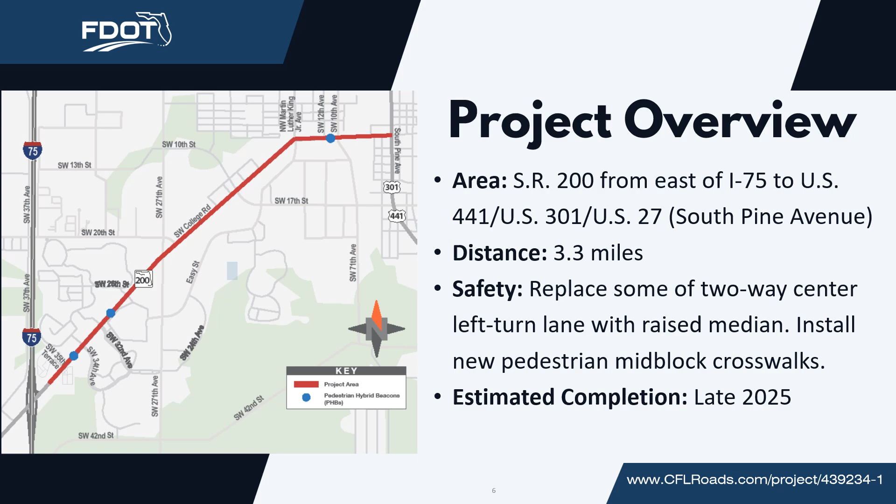FDOT is working toward a goal of 0 fatalities and serious injuries on state roadways. With every project, the department looks at existing traffic data and evaluates whether engineering steps can be taken to help enhance safety. The proposed changes in this project will improve safety throughout the corridor by providing fewer and safer left turn opportunities, including signalized intersections, and will encourage safer driving speeds, enhance pedestrian connectivity, and provide overall safety for all users.

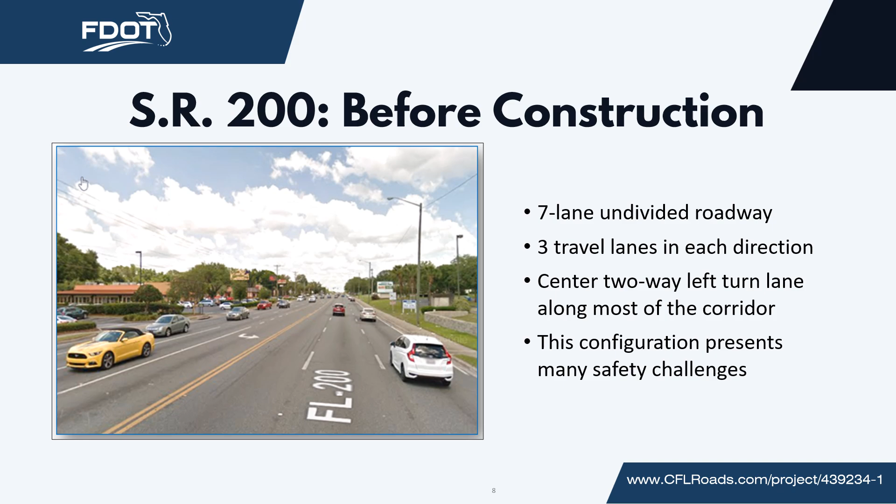State Road 200 is a 7-lane undivided roadway with 3 travel lanes in each direction and an unrestricted center 2-way left turn lane in the middle. The lack of median restrictions on this roadway means there are more conflict points. Conflict points are places along a roadway where the paths of 2 vehicles can legally cross, just not at the same time. In other words, a conflict point is a location where a crash can occur.

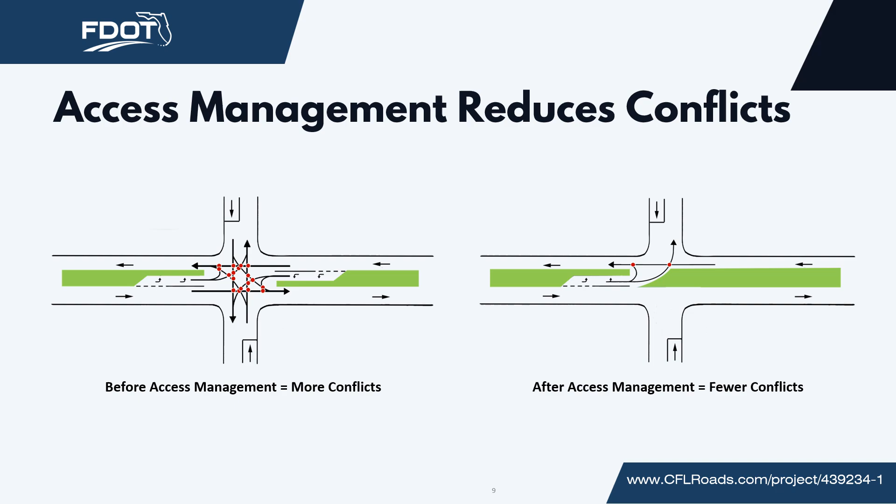FDOT data shows there were nearly 1,000 crashes with serious injuries along the corridor in a 10-year period. And of those crashes, 8 people died, including 2 pedestrians. From 2014 to 2023, there were 3,793 crashes along State Road 200 from just west of I-75 to US 441 or US 301. There were 379.3 crashes on average each year from 2014 to 2023.

Of those crashes, 39 involved bicycles with no fatalities, and 25 involved pedestrians with 2 fatalities. A lack of median restrictions contributed to the high number of crashes. Also, two-way left turn lanes are intended for roadways with fewer lanes and lower speed limits. The recommended improvements are designed to help reduce conflict points and therefore reduce crashes and crash-related injuries.

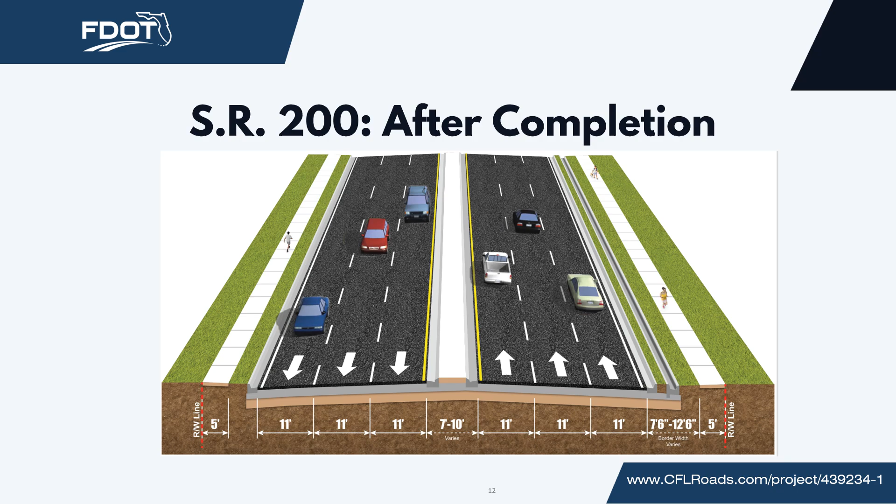As seen in this artist's rendering of the corridor, replacing the center turn lane with a raised median will reduce many left turn conflict points. However, constructing the median will require several lanes to be closed at certain times. FDOT has been working diligently to formulate a plan to reduce these construction impacts. The median installation will require 2 lanes to be closed at a time. However, FDOT finalized a plan to mitigate lane closures as much as possible.

The new median will be constructed from east of I-75 to east of Southwest 17th Street, and the existing median will be upgraded from MLK Jr. Avenue to US 441 or US 301. FDOT plans to minimize lane closures by closing short segments of the inside lanes in each direction during installation.

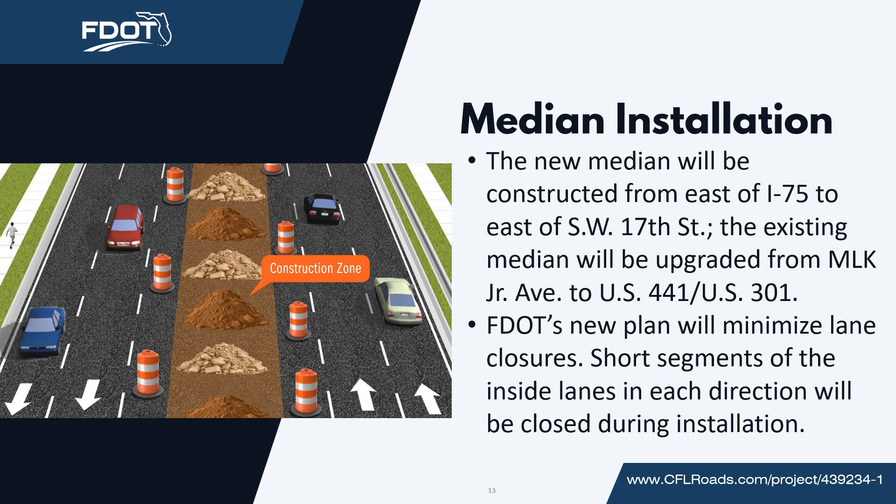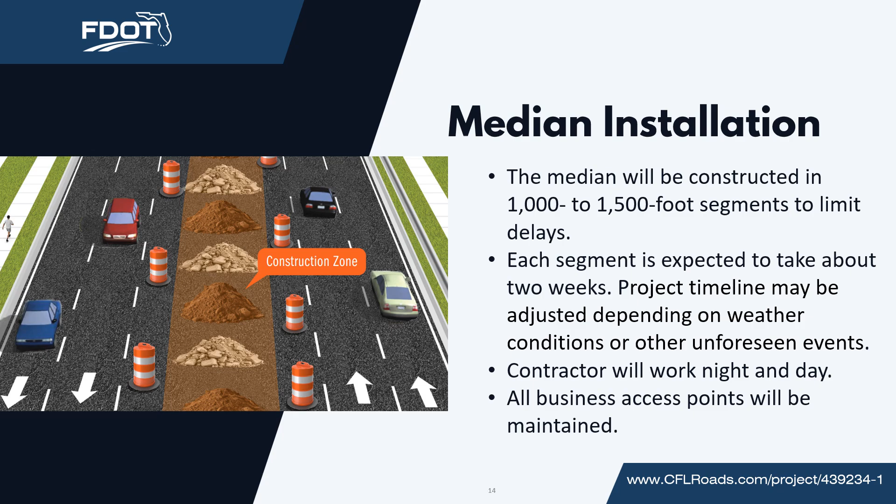The median will be constructed in 1,000 to 1,500 foot segments to limit delays. Each segment is expected to take about 2 weeks. Project timeline may be adjusted depending on weather conditions or other unforeseen events. The contractor will be working night and day. All business access points will be maintained.

Pedestrian safety enhancements include the construction of mid-block crossings equipped with pedestrian hybrid beacons, or PHBs. The proposed PHBs will be constructed between Southwest 35th Terrace and Southwest 34th Avenue, Southwest 32nd Avenue and Southwest 26th Street, and Southwest 12th Avenue and Southwest 10th Avenue.

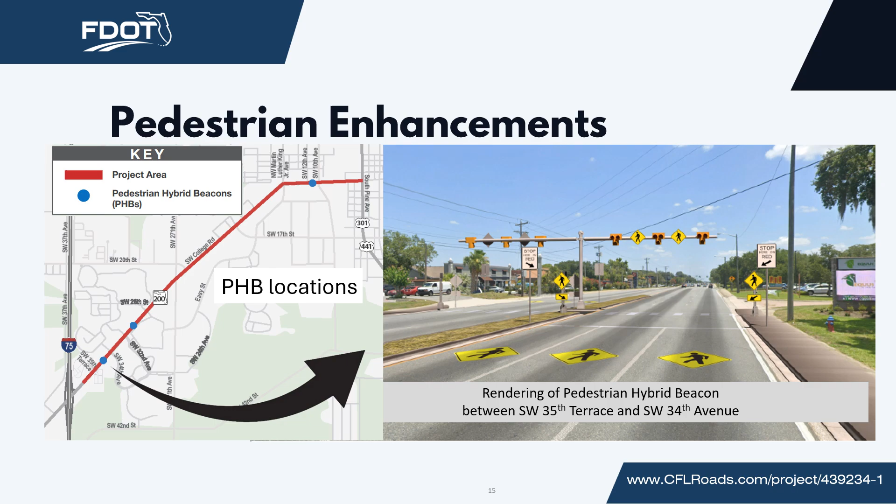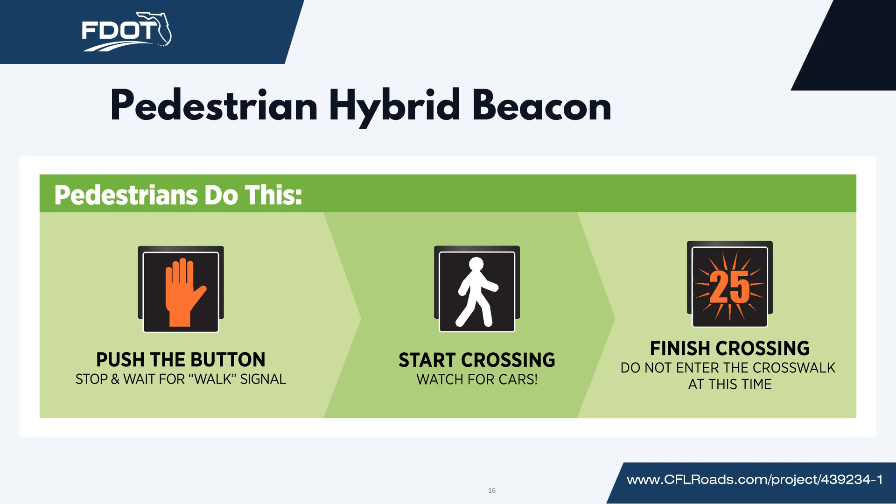This artist's rendering shows how one mid-block crossing with a PHB will look along the project corridor between Southwest 35th Terrace and Southwest 34th Avenue. The PHBs are mounted on a mast arm over a crosswalk. When the pedestrian walks up to the crosswalk, they push the button. The pedestrian then stops and waits for the walk signal. The pedestrian then walks across the crosswalk while watching for cars. There will be a flashing timer that lets the pedestrian know how long they have to cross.

For drivers approaching a PHB, the PHB is dark when no one is crossing. When a pedestrian pushes the button to cross, the PHB flashes yellow and then turns solid yellow to alert drivers a pedestrian wishes to cross the street. The signal will then turn red, indicating to motorists to stop. After providing time to allow pedestrians to cross, the red lights will flash, indicating motorists may proceed if the crosswalk is clear.

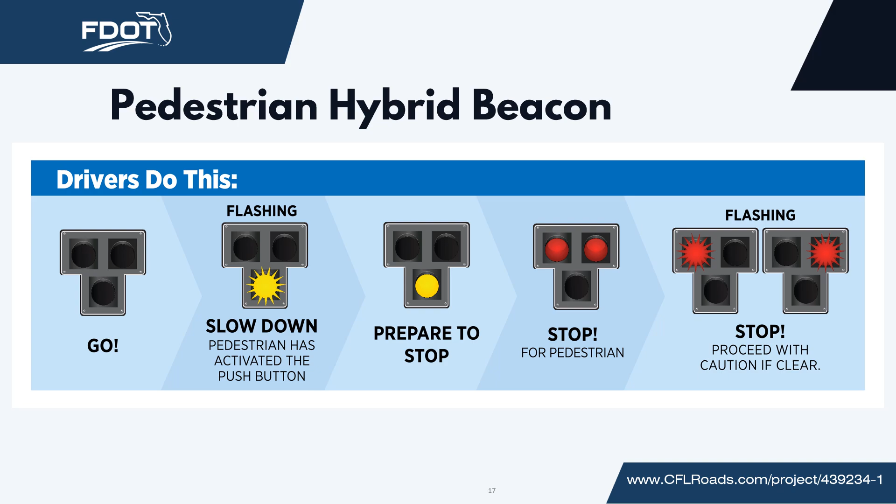FDOT has been working on lighting, curbs, gutters, sidewalks, and planter installations since September 2024. Planters are traffic calming devices that can reduce vehicle speed on high-volume roadways. Additionally, FDOT has been preparing areas for signal upgrades, including the PHBs and the median installation, which will begin in March.

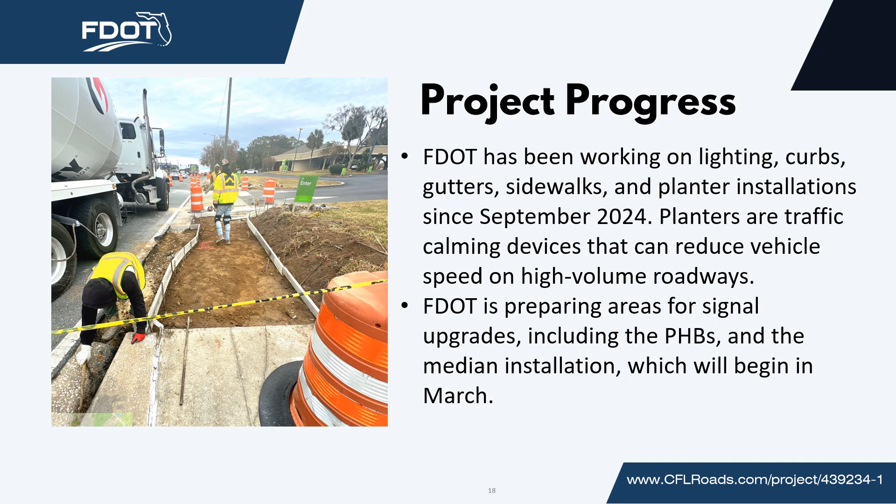Future work will include paving operations, which will begin this spring near I-75 and move north toward US 441. After paving, striping and pavement markings will follow. Also, PHBs will be added concurrently as the median is installed in those locations. Sign installations and landscaping will begin in summer 2025, and signal and lighting work will continue throughout the duration of the project. At this time, the project is estimated to be completed by late 2025.

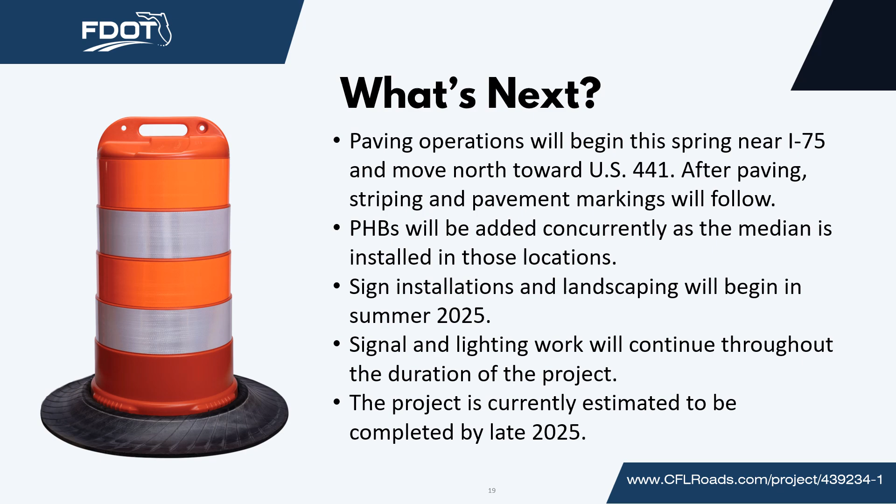Your feedback is important, and we want to hear from you. You may submit written questions or comments, or provide comments online through the project website at www.cflroads.com/project/439234-1 or during the webinar. To submit a comment or question during the webinar, use the question pane on the GoToWebinar control panel.

You can also reach FDOT Project Manager Denise Larkin directly by email at denise.larkin@dot.state.fl.us, or by U.S. mail at the Florida Department of Transportation, Ocala Operations, 627 Northwest 30th Avenue, Ocala, Florida 34475. You may also call Ms. Larkin at 352-620-3007 to provide verbal comments during normal business hours.

This public meeting was advertised and is being conducted in accordance with state and federal requirements, including Title VI of the Civil Rights Act of 1964. Public participation is solicited without regard to race, color, national origin, age, sex, religion, disability, or family status. Persons wishing to express their concerns about Title VI may do so by contacting Melissa McKinney, District 5 Title VI Coordinator, by mail at 719 South Woodland Boulevard, Mail Station 501, DeLand, Florida 32720, by phone at 386-943-5077, or email melissa.mckinney@dot.state.fl.us.